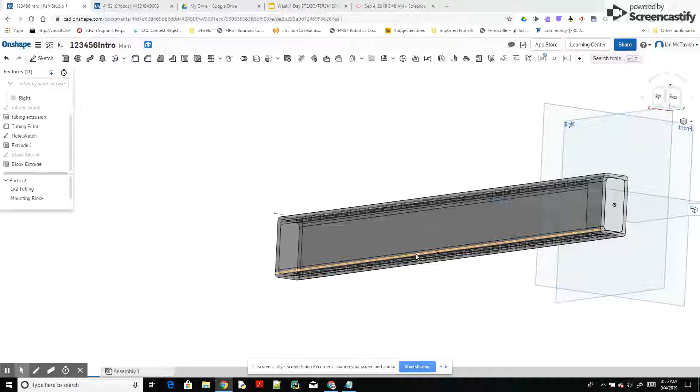Okay, so we are going to start putting these pieces together. Right now we've got an assembly and a part studio, and we're just going to switch tabs to go over to the assembly tab, and an assembly allows us to have different parts. So first off, we're going to insert; there's all the pieces that we've created so far. So we're going to start by inserting the tubing and inserting the mounting block.

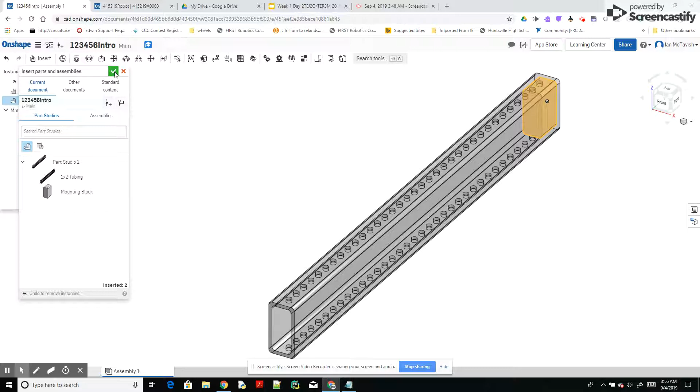And you can see as I click them, they appear in the same position that I created them in the part studio. So it's really handy to think about where you create things. So I'm going to click the check mark, and I've now inserted those things. And I'm going to take the tubing, and so I've just clicked on it, and if I right click on it, I can select fix.

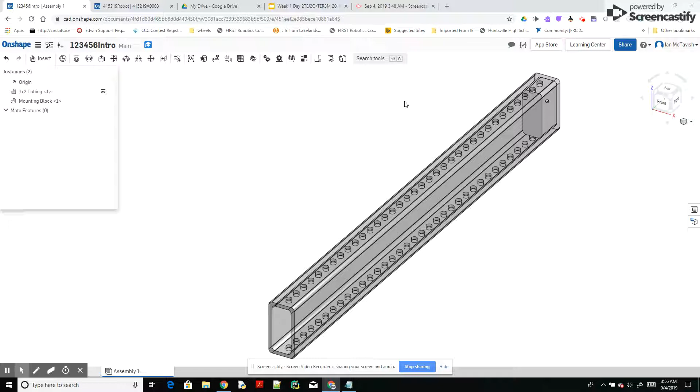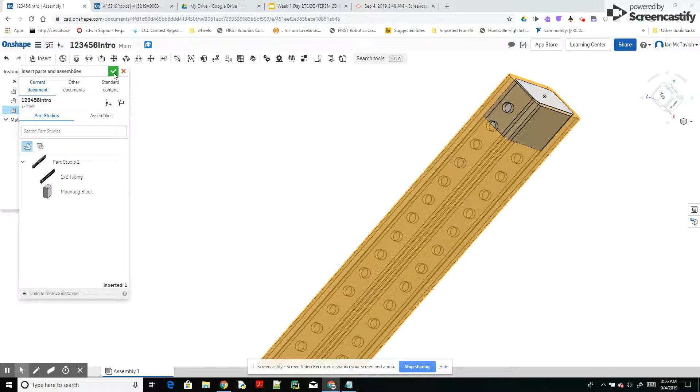And what that means is that I can drag things around, but it's not going to change the position of where things are. So what I can do now is that I can look at how things are lined up. And what I'm going to do is I'm going to add another piece of tubing, and I'm going to put it right there. So I'm just going to go insert tubing, and you'll notice I'm moving my mouse around so that way I can set the initial position of it and the green check mark. And that way it's not overlapping.

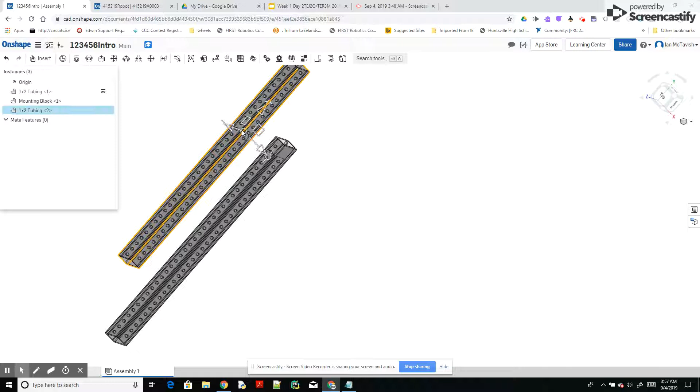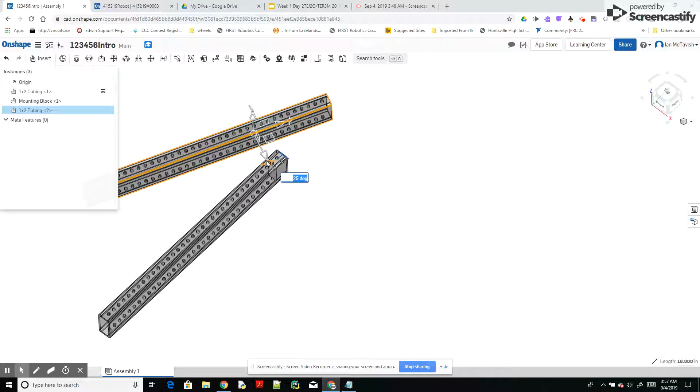So what I'm going to do is I am going to take these tubings, and this particular one, I'm going to want to rotate it. So when I click on something, I get my little three arrowed device, and this allows me to move things and rotate them. So this part where it's got the curve, I can press that and turn it, and now I get degrees, and I can type in something like 90 degrees, and now I've got it moved. I can also use the arrow so that I can move things in position. Okay, so I've got this moved.

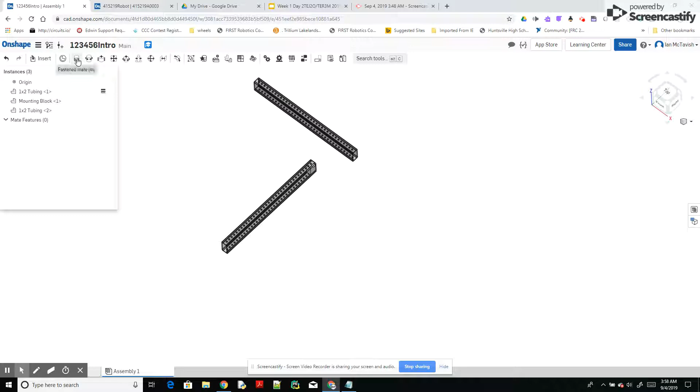What I want to do now is that I'm going to use a fastened mate, and if I zoom in, so as I'm doing things, you can see I'm using my, well, you can't see, I'm using my scroll wheel, and I'm zooming in. And what I'm going to do is I'm going to take this side and this point right here. So where you position your mouse will determine if you get this green, blue, and red lined mate connector. So there's my mate connector.

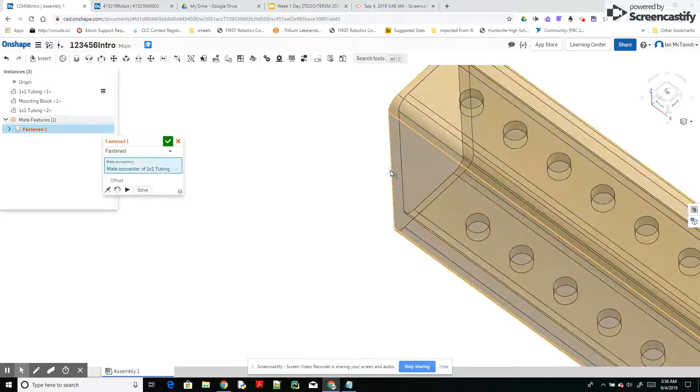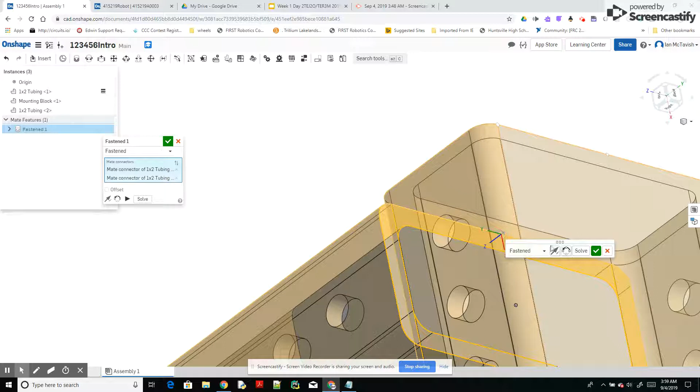And what I'm going to do is I'm using my right mouse button to just rotate and zooming in, and I'm going to take this face and I'm going to use the mate connector right there, and I'm going to solve it. And before I solve it, I just want to point out, if you need to reposition things, you can do that. That's why I rotated it in the first place so that everything would fit nicely. And you can see those pieces are now connected.

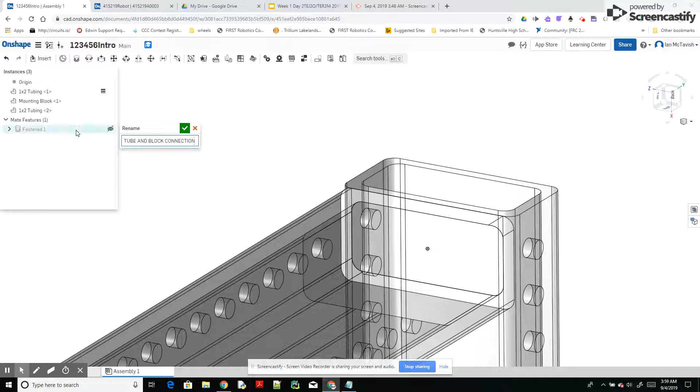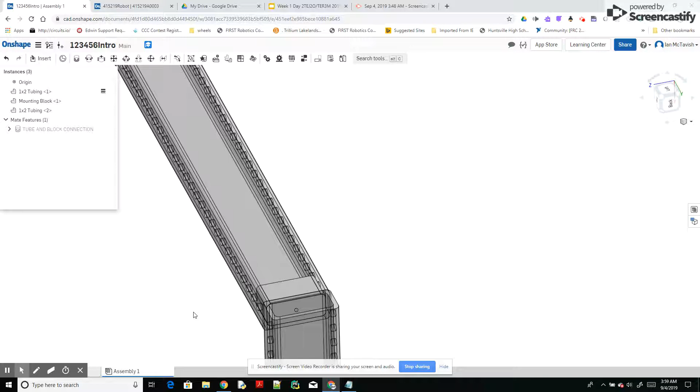Again, getting to our naming conventions: tube and block connection. It's really hard to keep track of things if you just use default names. So I have my pieces in position. What you really want to think about is how are you securing them. Right now, my block is just sitting there. So I could glue it, not a great choice, or I can use fasteners like bolts, and in our next video, I'll show you how to do that.